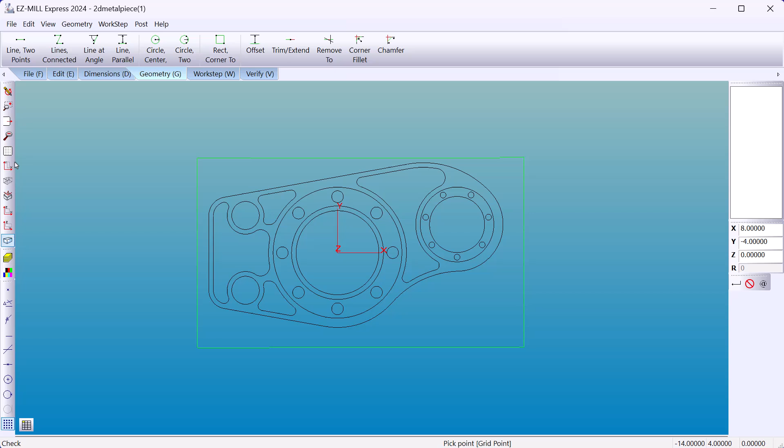Hi, and welcome to a mill demonstration, machining geometry. I'm going to begin with positioning our coordinate system. You can place it anywhere on your part. I'm just going to place it on the top, any one of these 9 standard locations using the wizard.

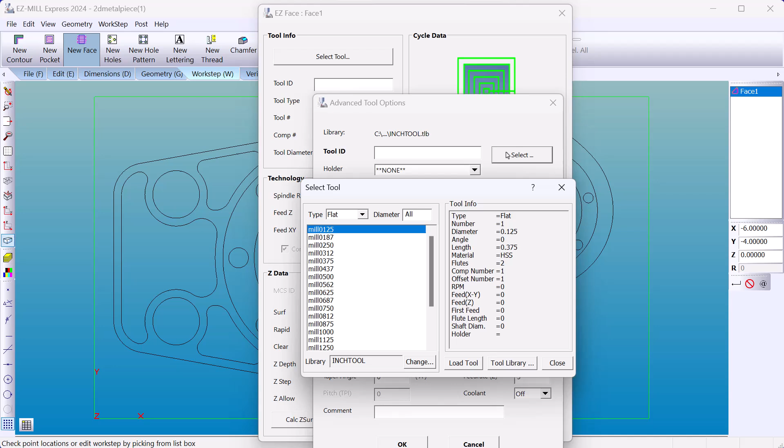Now we'll begin by machining up to the part by the stock boundary. I'll use a new face. You can select a tool from a library. You can go into the library and create your own or change any of these values on the fly. I'm going to use tool 1. Again, you can change the values on the fly. There's no need to go to the library if you choose not to.

You can adjust your RPM, your feed rates. You can go to advanced and calculate those. The depth of cut, let's go with 3/4. I'll use a zigzag style toolpath, and we'll leave 10 thousandths on the part.

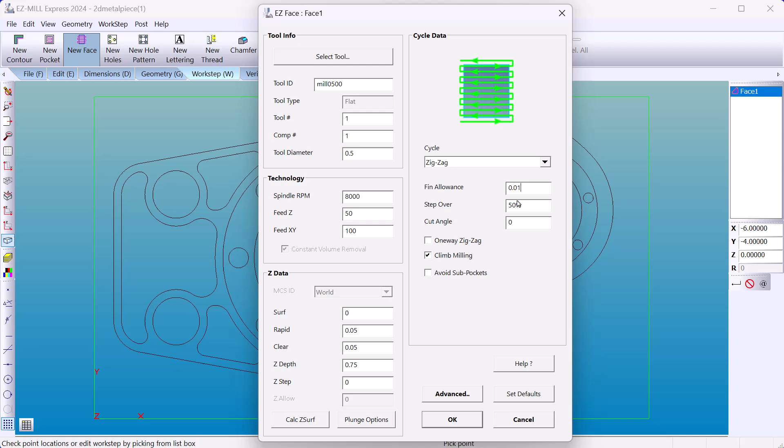Now with curve chain, I click on one piece of geometry twice. It'll find all the connected geometry and close it. Then we're going to do the same for the part and verify. 3D preview. Now I'm going to hide that so I can work with the rest of the geometry.

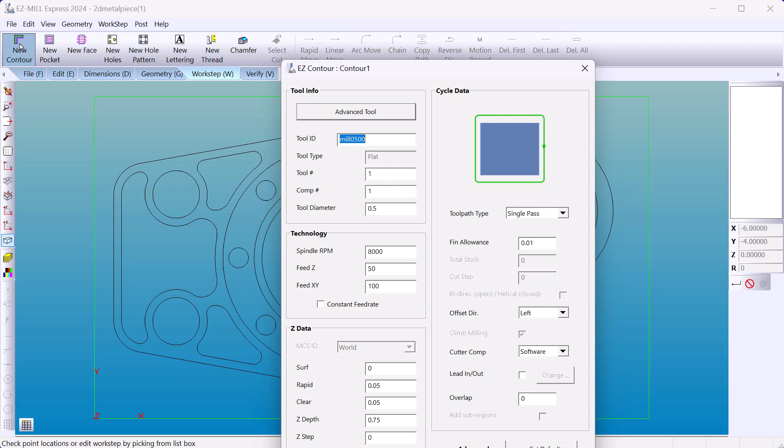Now we're going to machine that 10 thousandths off the part perimeter. That'll be a new contour. I'll maybe change this to tool number 2. We'll go in with a 3/4 cutter. We'll adjust our depth to 780 maybe. We'll take a single pass. You do have multiple choices.

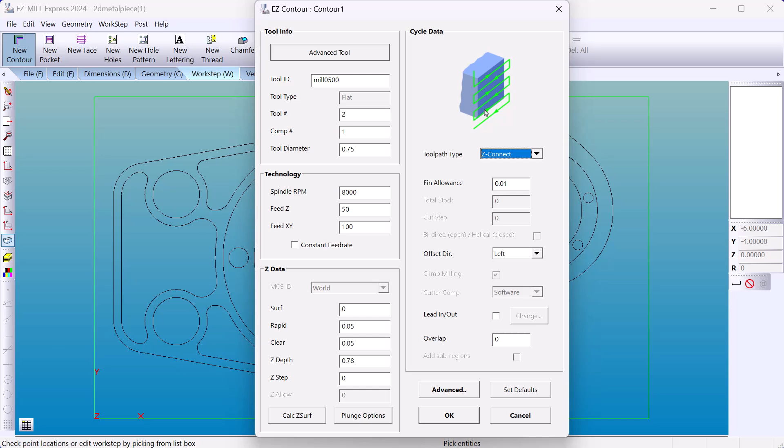Multi-pass, you can tell it a total stock and cut up to the wall. Z-connect if you're going to have a depth with a step. You can also do a helical. You can start at the top and feed around the part in a corkscrew fashion. We have 3D curves if you're going to machine over surfaces. And then we have plunge milling as well.

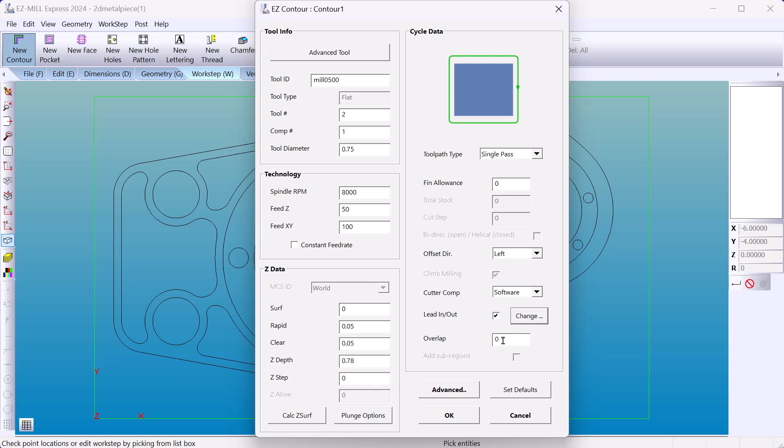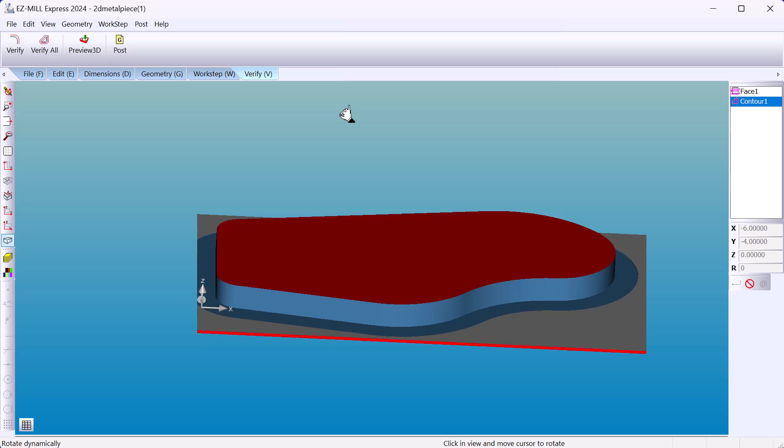So we'll remove the finish allowance. I'll add a lead in and lead out. EZ-CAM gives you these values as default. You can certainly change those. And if you don't want to leave a witness mark, you might have an overlap. Giving you a close-up for the overlap. 3D preview. The change in color is the change in tool number.

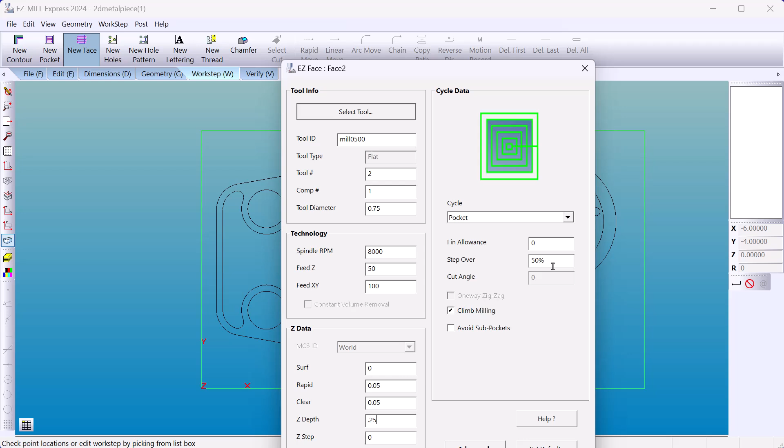Now I'll machine the next step. We'll use the part boundary and machine these islands. So I'm going to go back and I'm going to hide what we have. Another face work step. We'll machine 1/4 of an inch. I'll use the pocket. Now it doesn't have to be 50%. It could be .375, is equivalent. There's our stock boundary basically. Then we have our islands.

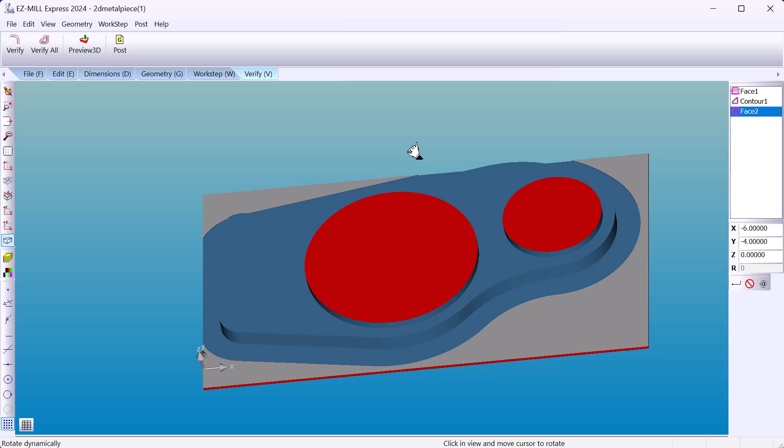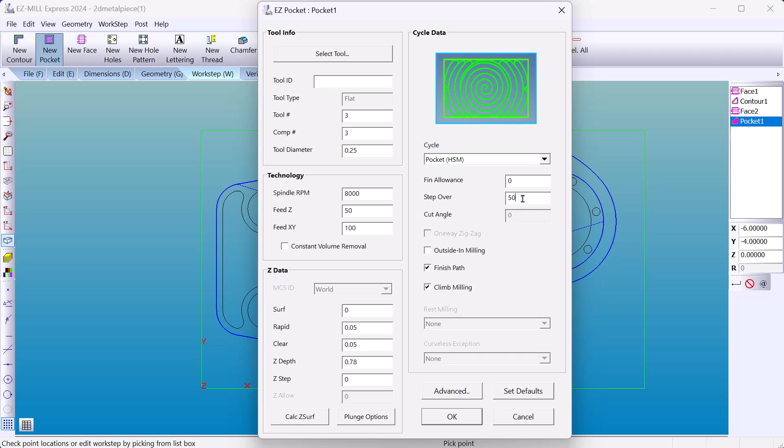Now for our pockets, I'll just change these values on the fly. They're through pockets, so we had 3/4. Let's go to .780 as we did with the part profile. Finish allowance of 0. We're going to use high-speed machining and use a finish pass. Step over, let's go with 50%. Select our through pockets.

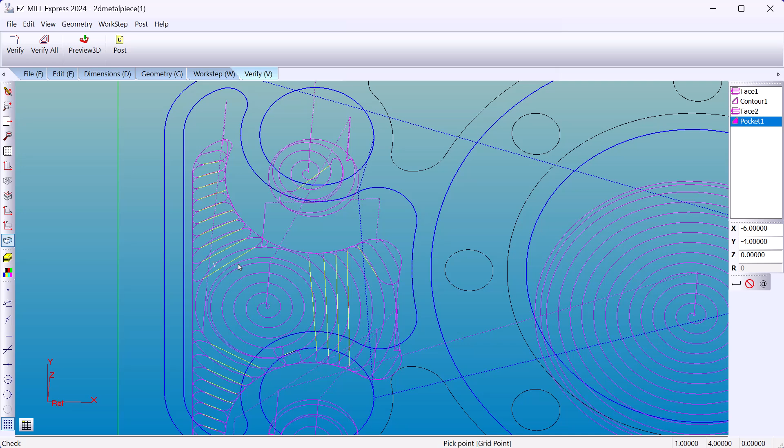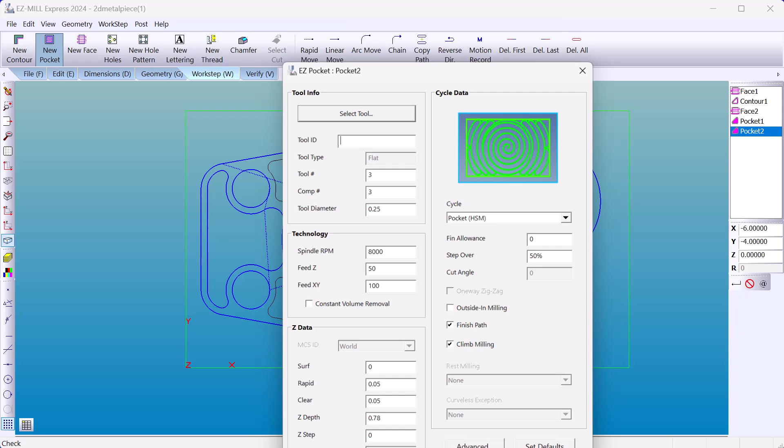Now the yellow is a high feed rate return based on the max feed rate on your machine or a feed rate you specify. Let's take a look at a 3D preview. Now for the shallower pockets. And we have the holes. That's all that is left.

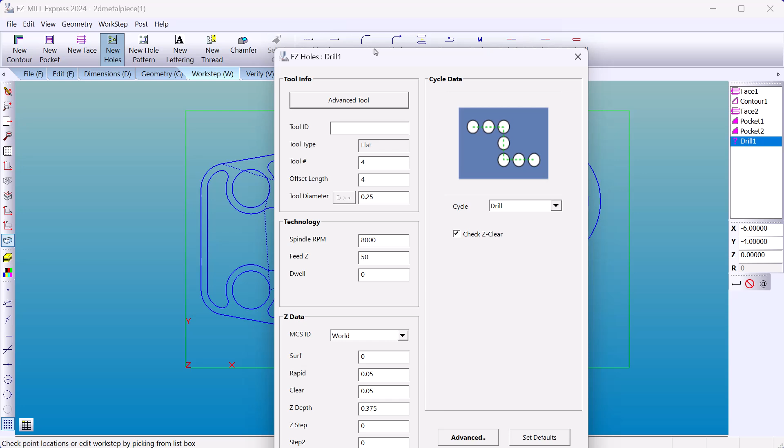So we're going to check the radius. That is a 1/2 inch diameter hole. And over here we have a 1/4 inch diameter hole. I'll go to Advanced Tool. This will be a drill. Tool number 5. Diameter 0.5. The length. And the tip angle, let's say 118 degrees.

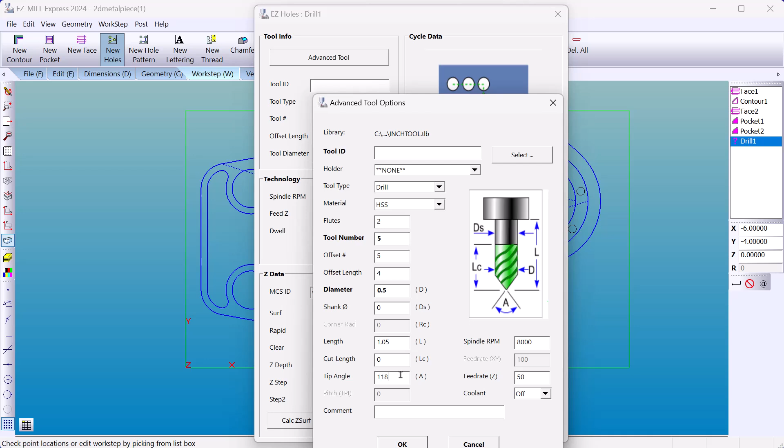Depth, 1 inch. And if we're going to peck, I might go 1/4 inch. The cycle type is drill, so it's not going to peck. It feeds straight down. Spot face will dwell. Deep hole will pull the drill right out of the hole as it pecks. Chip break will keep it in the hole, just breaking based on the machine parameter. We have tapping, boring, feed in, dwell, feed out, bore, feed in, feed out. So we'll do deep hole.

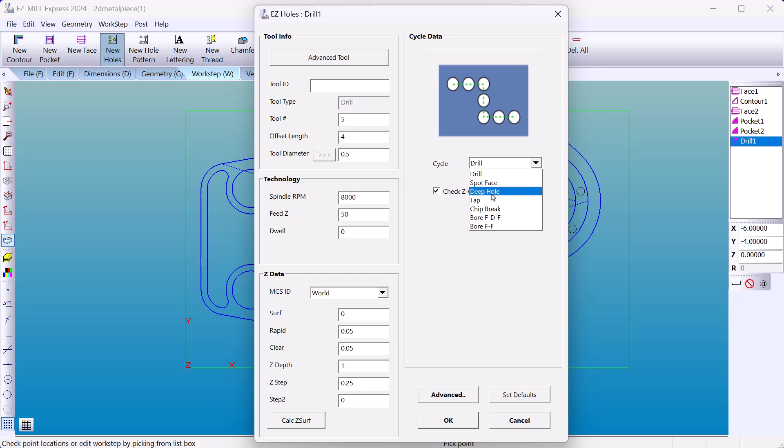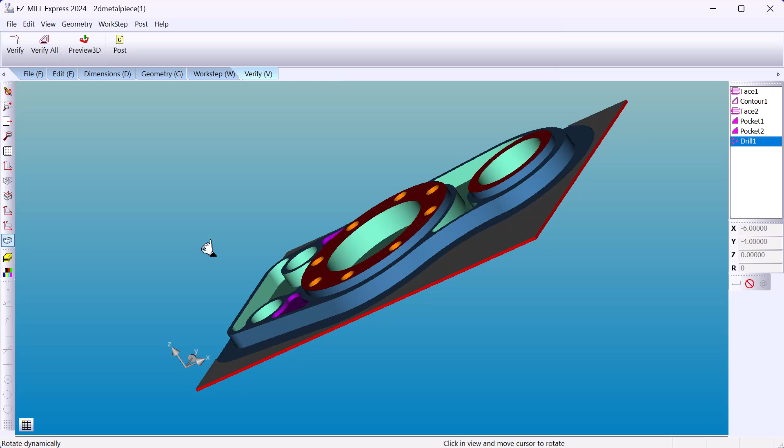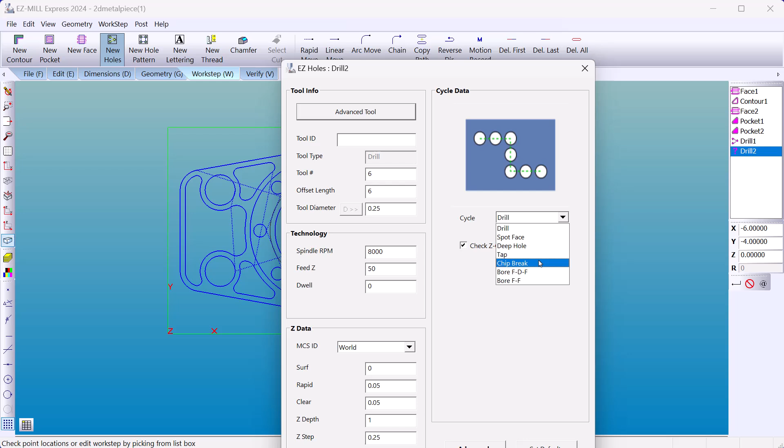With chain, I just click one hole and the second hole of the same diameter. EZCAM finds them all. Okay, we just have one set of holes left and we've completed the task. And if I verify all, it gives me an estimated machine time. You can use that for quoting. Takes all your feeds and speeds that you've set into account.

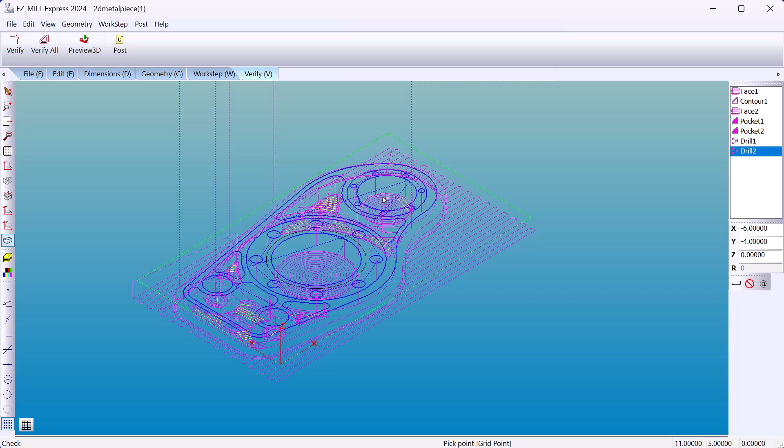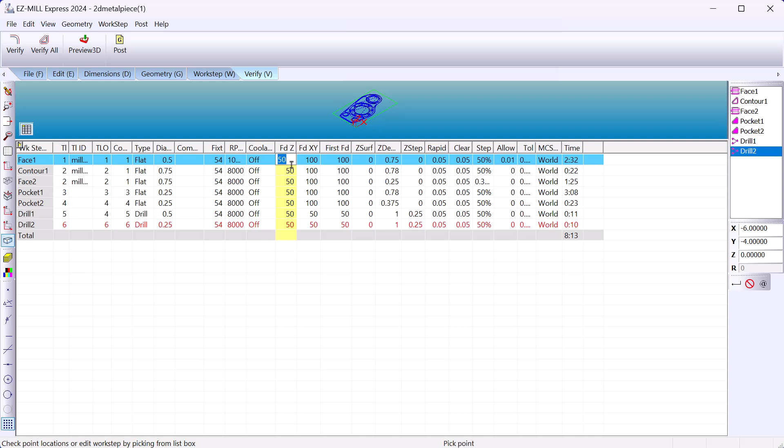Now if you want to verify things before we post our code, down in the lower left corner you have this button that brings up the work step manager. And so we have a flat end mill 1/2 inch. Maybe I would adjust the RPM accordingly. Your feed rates can change, and so on. Verify all again. And our 3D preview. Everything is completed. Then you go to post.

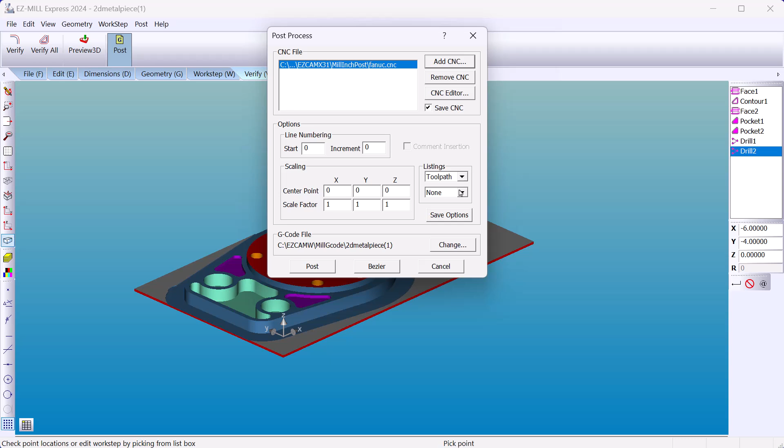You have a library that you can choose posts from. We cover just about every machine on the market. If not, we can use a CNC editor, and EZCAM can modify a post to your own personal preferences or your machine's requirements. I'm just going to change this over to Notepad so we can take a look at the posted code. In this post, we give it the name of the part, the date, and all of your code with tool changes.